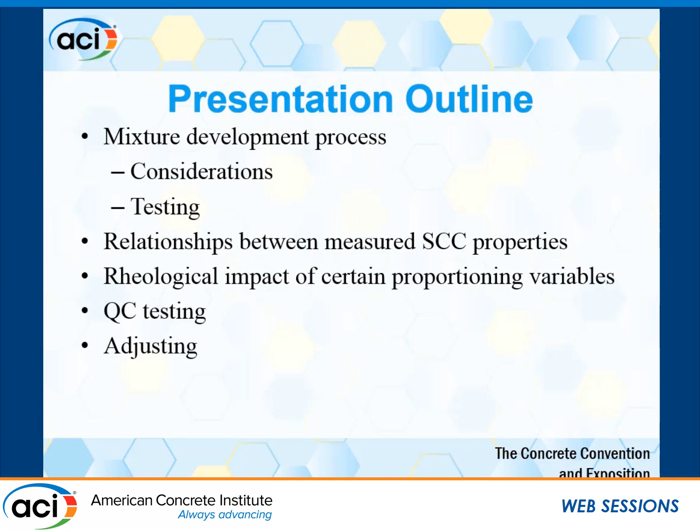And then finally, hey, we're in the field, something's wrong with this particular batch of concrete. What should I do? Right? Has anybody ever been there? Reject it. Typical, right? How about we find a way to save it, right? That's it. So, all right.

So we go through the SCC mixture development process, and there's an awful lot that is involved in this process. And one of the things that I would really like to recommend to everybody in here is don't shortchange this process. I think there was a question earlier, hey, should we just take that mix design and run with it? You can, but it's probably not the best thing to do. At least take a look at it. Be practical with it, and don't shortchange it,

because there's a lot of things that go into choosing the right SCC. Whether it's the size of the jobs, what are those performance targets, the hardened properties, the fresh properties, that matrix that Terry showed earlier, the element characteristics. How is it being placed? How long is it going to take to place it? Are we dropping it, etc.? All these things determine what I need this SCC mixture to do.

Because remember, as self-consolidating concrete, what really makes it different, let's not talk about proportions yet, but what really sets it apart from conventional concrete are those fresh properties that we're looking for. And so we need to keep those things in mind in how they influence or are influenced as we're developing the mixtures in the lab.

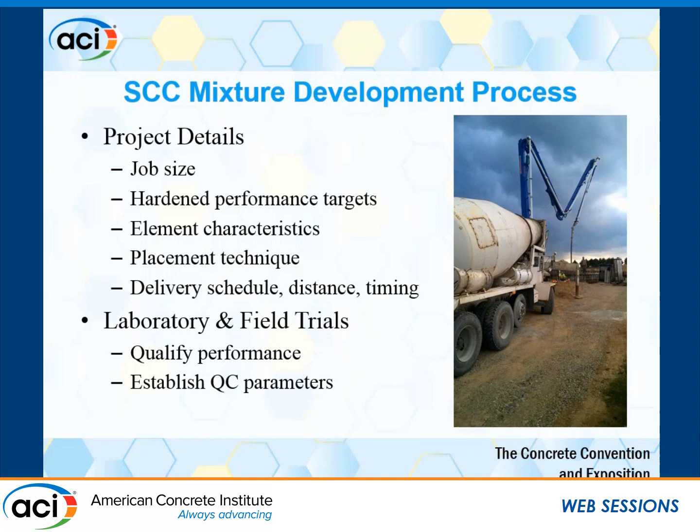So then again, we consider all these things, we go into the lab, we have the materials that we can use for the project, and we develop some mixtures. Maybe we develop a couple of mixtures, run it through a wide variety of different tests. And the different tests that we typically do, I just threw a bunch of them on here, and I do have the L-box too, but that's okay. But these are just good ways to evaluate the mixture for what it's going to be able to do.

How far does it flow? How fast does it move? Because here's the thing to consider. I should certainly match up how fast that SCC mixture moves through my form with how rapidly I place it.

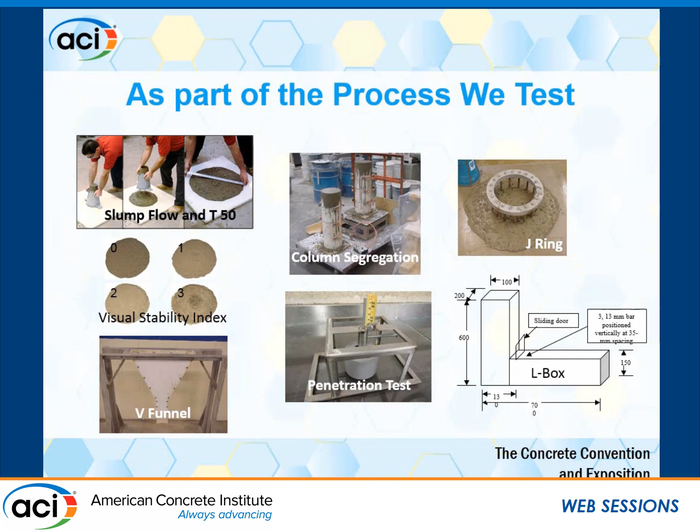Right? Because it's going to fill up the forms at different speeds, and you need to consider that. The visual stability index or other stability tests. These are all important things as we're developing SCC in the lab, running through different materials, that we understand the fluidity behavior, the stability behavior, the passing ability behavior, regardless of which test you use. Choose whichever ones you like, but make sure that they're defining the performance parameters that you need for your project. That's the important thing.

Now, as we go through all this testing in the lab, we should always have at least half an eye looking towards what we're going to do in the field. How are we going to control it as we produce it? We shouldn't just be doing testing, get all these numbers, and then push that off to the side because we have a mix. Run it. Those tests that we run in the lab should have some link in our minds to how we're going to control performance in the field, on the job site, out of the batch plant.

And so as we're doing that, we should think through, okay, it's usually not very easy to test stability in the field, so I'm going to focus on that today. So how do we make sure that we've got the right parameters set so that we ensure a stable mixture in the field through our testing? Well, we know that for a given SCC mixture, a set of mixture proportions and a set of materials, there is a distinct relationship between the slump flow amount and its stability. The higher I go in fluidity, the more care I need to take to ensure that the mixture stays stable.

And all I did was pull out two mixtures here that we adjusted simply with high-range water reducer, the exact same batch of concrete. We did our column segregation test, went from a 23 to a 26 to a 29-inch slump flow, and we saw the segregation for those two different mixtures. Now, the other important point is, what should the slump flow range be for quality control testing for this mix versus this mix? If our maximum is 10% segregation, I could have a 23 to 29-inch spread just to control stability. I'm not saying we'd want that for placing in a wall, but for this mixture, I can't have that wide of a range.

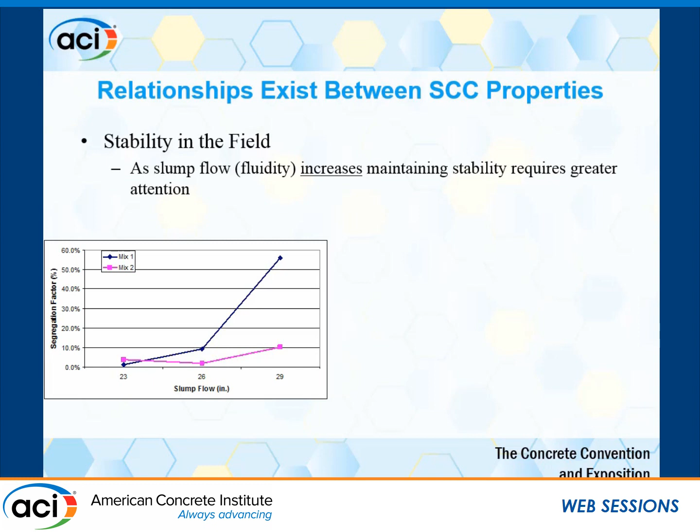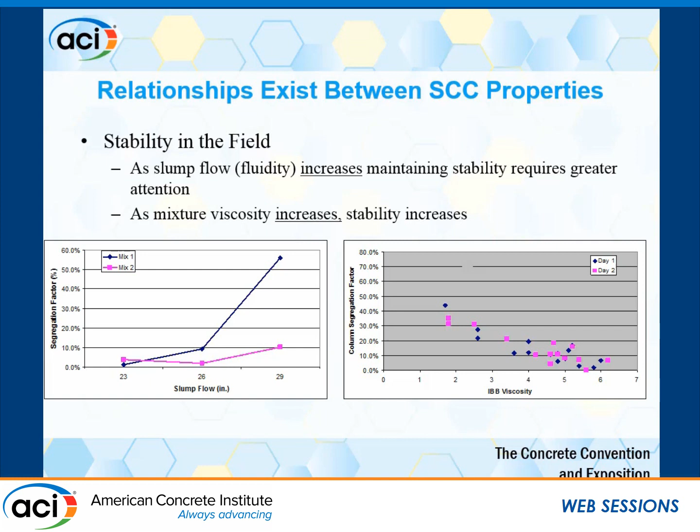So the way that we set specifications should not just be to randomly say plus or minus 1.5 inches, that's good. It should be based on what the mixture can do. And what we're seeing here is that they can do different things. We also know that as the viscosity of a mixture increases, generally speaking, we tend to improve the overall segregation resistance or stability of a mixture. So we have these two things in mind. Mixture gets more fluid, it gets less stable; mixture gets stickier, more viscous, it becomes more stable. Those are general trends. And remember, I'm talking about trends from the practical perspective of how we control things in the field.

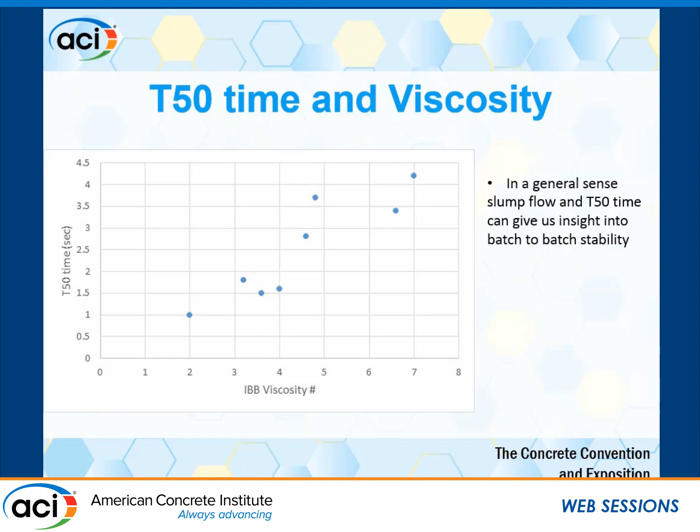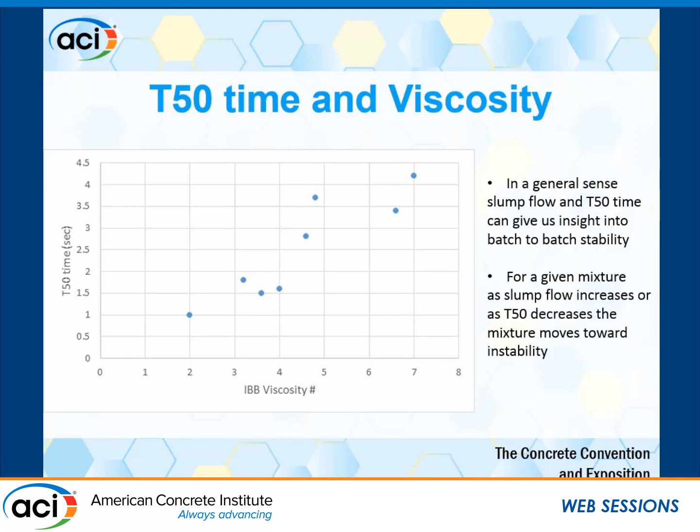We also know that our T50 time, in general, matches with our viscosity. So now I've got the idea that slump flow and T50 together can give me some insight on site or at the batch plant into the overall stability of a mixture. They can put me in the right ballpark. Again, I already have a mixture developed. I keep wanting to state this. I'm not developing mixtures now. As slump flow or T50 shift, my stability shifts with them for a given mixture. So for a given mixture, as slump flow increases and T50 decreases, the mixture tends to move towards a more unstable mix.

Now, I've done all this testing. I understand some of these relationships. What we suggest our customers do is go through a process of some very simple robustness testing. I mentioned earlier that we had the same batch of concrete and we added more and more high range to it and changed the slump flow levels. As we hit those different levels of slump flow, we can do a variety of other tests at those points and start linking together what may happen in the field if slump flows go up or down. We can also do it with water, just in case moistures aren't exact batch to batch. That might happen sometimes, okay?

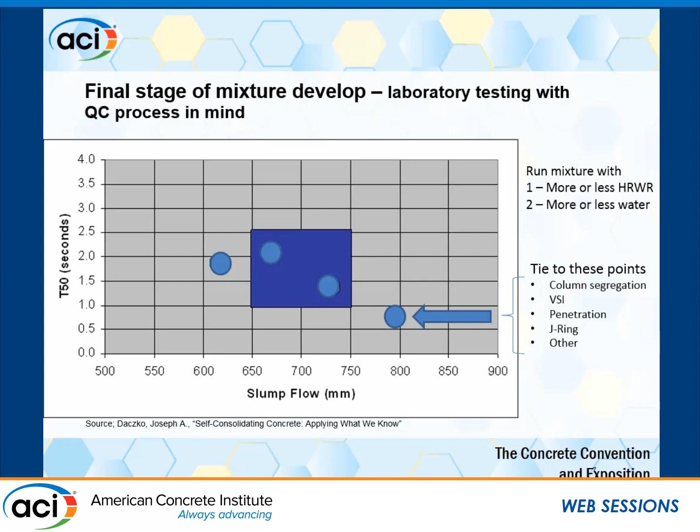We're not just measuring slump. It's actually a good thing that we can measure some other thing that gives us an indication of the viscosity. Now we have the opportunity to be more direct and to make better adjustments. So in the field, we need to be doing more measurements. The other thing I want to suggest to you, and I hope that you'll see how all these different things come together here at the end, so bear with me.

When I'm in the laboratory and I'm making different adjustments, now go figure, here's an admixture guy telling you that not all polycarboxylate high ranges give you the same performance. They don't. I really want to make sure that everybody gets that. They don't all perform the same. And so what this shows you here is my dosage based on the amount of slump flow that I get for 3 different polycarboxylate high ranges.

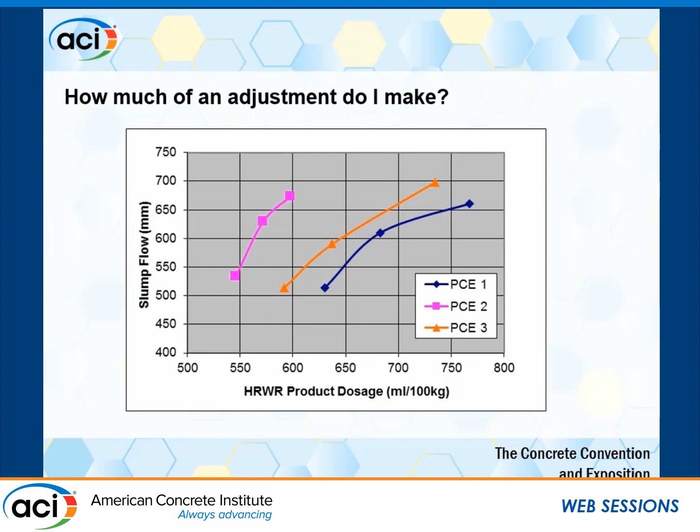Now, I should know this, because I'm going to want to make adjustments to my SCC mixture if I'm not hitting the right slump flow. I should know whether or not a slight change in polycarboxylate 2 here is going to give me another 75 millimeters of slump flow rather than 20. I really want to know that. So talk to your admixture supplier, because they know. Don't just assume that per 100 weight will give me 50 millimeters for everything. That's setting yourself up for problems.

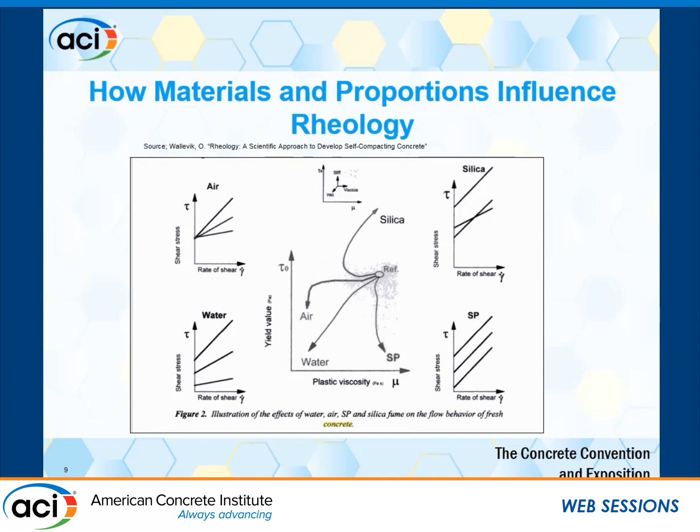So we've seen some of these things from Olafur, where different materials influence viscosity, whether it's addition of water from a reference point. We see that yield goes down, plastic viscosity goes down. What I'm trying to do here is link these material behaviors to our practical tests in the field, which is T50 time and slump flow. So in general, if I have a reference SCC mixture and my water content goes up, my T50 time is going to get faster and my slump flow is going to get higher. Pretty straightforward.

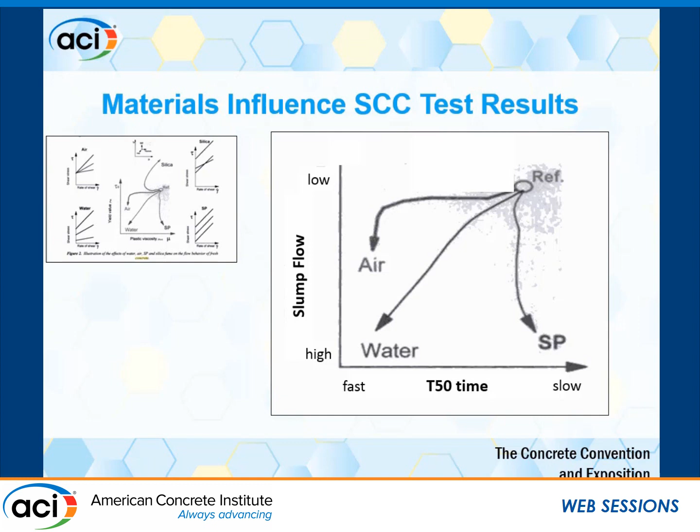If I add superplasticizer to that same mixture, my slump flow is going to get higher, but my T50 time will probably stay in the same range. This is important now. Consider that you're out in the field and you're getting slump flow and T50 measurements. Remember this thing that we showed earlier. Now, if I start getting results in some of these different spots, okay, the mixture down here is flowing faster and it's flowing too far.

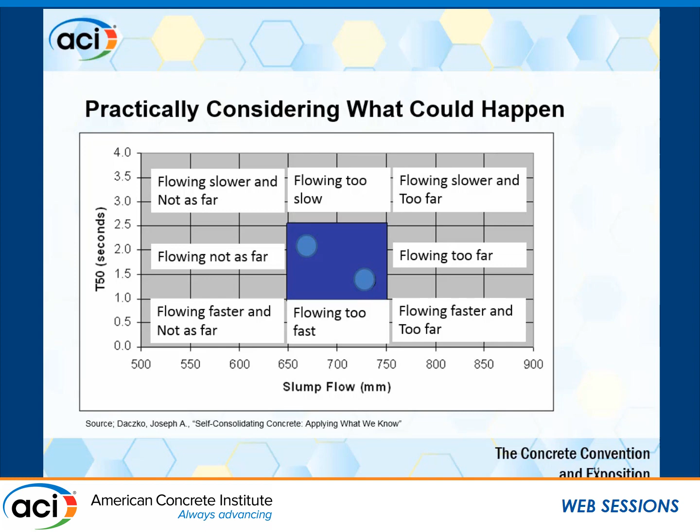What could make that happen is what the batch person or the person in the field should ask themselves. Is it too much water? Is my mixture design off? Because remember, we're batching the same mixture time and time again. I would suggest to you that we can go to something like this.

If this is my target area, and I have it well defined, and my slump flow, let's say in my T50, is on target, I'm right in here, and my slump flow is short, remember, high range is not going to change my T50. If I add high range water reducer, it'll move me in this direction and get me back in the box.

Now, if my slump flow is too high and my T50 is too low, I would suggest that that's probably too much water, and you better check your moistures. Because if I pull water out of a mixture down here, my T50 is going to get slower and my slump flow is going to get shorter.

So this type of box can be created to guide the practitioner as you're batching concrete, as you're measuring batch to batch, and as you're measuring it out in the field. This is a way for us to gain control over SCC production. But it links all the way back to our mixture development process, right? I only know how much high range to add if I know how much high range to add, right? I have to have at least done it and know which high range that I'm using.

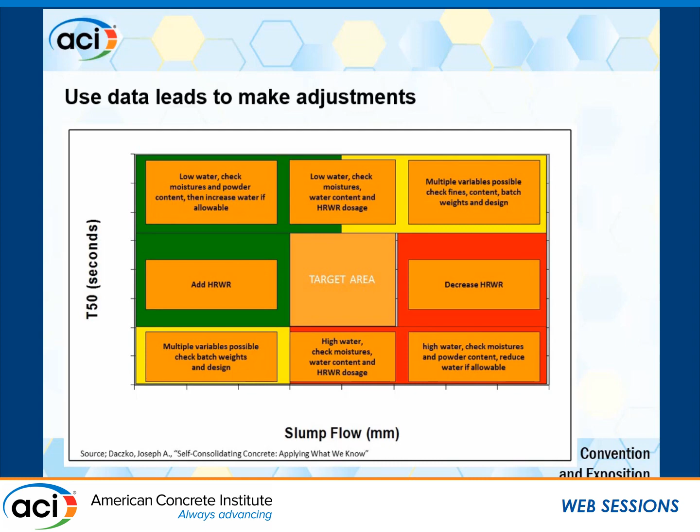So in conclusion, during the mixture development process, we need to be thinking about our quality control plan and developing it. And we can put together guidelines for our batch people to make adjustments. And those adjustments, remember, I showed you that if all I was getting was the slump flow measurement, I wouldn't be able to make an adjustment. I would be guessing. But SCC allows us the opportunity to measure all those things. And again, water or admixture additions are dependent on materials and the admixtures that you're using.

Thank you. Thank you, Joe. Got time for a question?

Very interesting presentation, Joe. My question to you, and I was going to ask this to Terry if he had the time, is that we have these specifications and requirements, and they are always tested within the first 10 minutes in the beginning of the job. But these jobs take 60 minutes, 90 minutes, sometimes 2 hours. So what do you do for that? How do you address this issue? Well, you're talking about the time-dependent behavior of an SCC mixture. What do you do about that? In the spec, or where do you get these things into the picture?

Well, what we always suggest to our customers is that there's a very clear conversation held with the contractor, which relates to placement techniques, placement time. How long is it going to take? What's the transportation time, plus the amount of time to place it, plus the amount of time that concrete's going to be sitting in the form waiting for another load to come on top of it to mix with it? Because it still needs to be a high slump flow until that next load comes on top of it, or else you'll get the joints. So you need to have that discussion and say that this concrete needs to last for this long, and then it needs to be developed appropriately.